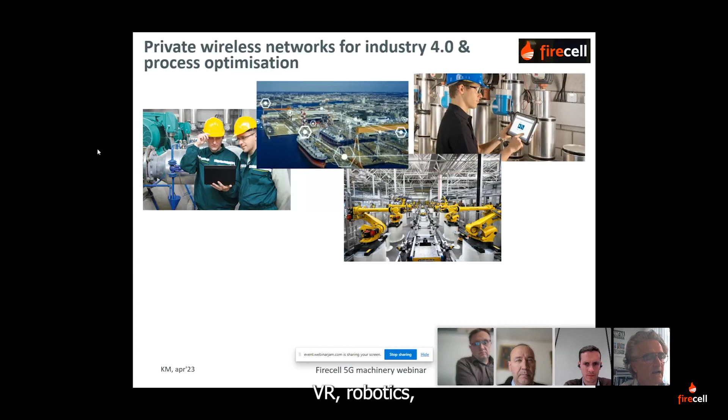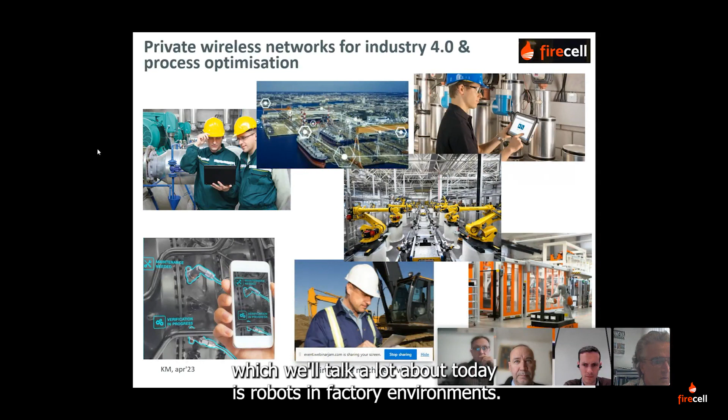Private wireless is more or less what is often called Industry 4.0, industry automation in its latest stages. You're talking about ports automation, manufacturing, heavy industry, lighter industry, use of tablets, AI, VR, robotics, augmented reality for maintenance purposes, steering of heavy industry like excavation and mining, and of course, which we'll talk a lot about today, robots in factory environments. These are all images of typical Industry 4.0 factory automation kind of settings.

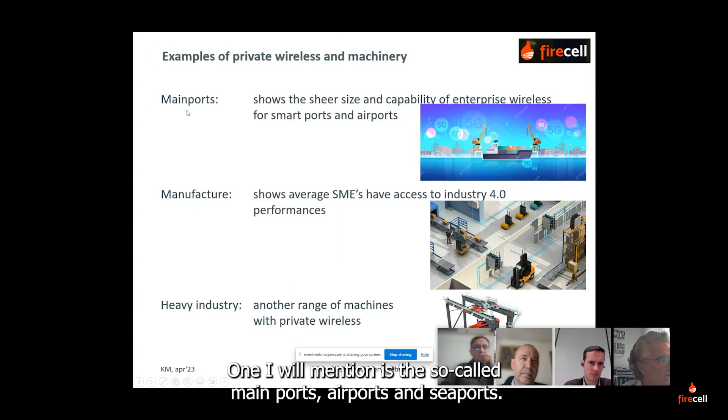I will use a few examples. One I will mention is the so-called main ports, airports and seaports. Of course those are large, and not everybody in the audience has a port, but I use those to show you the sheer size and capability of enterprise wireless, what wireless can do for an enterprise. These are truly large examples. Then I'll show you an example of manufacture, which is what today is all about, and another small example of heavy industry, a bit like what Amada will be showing.

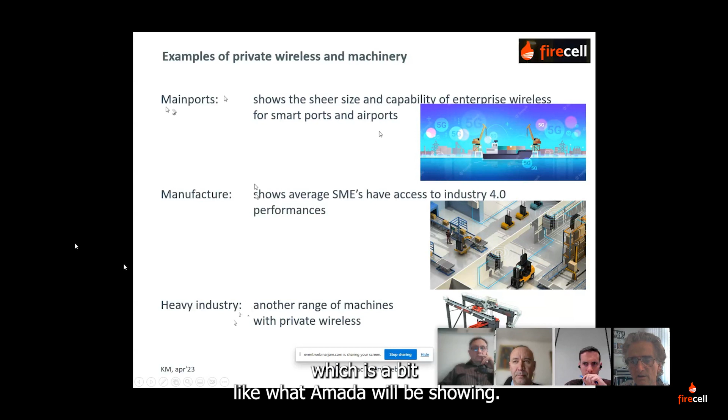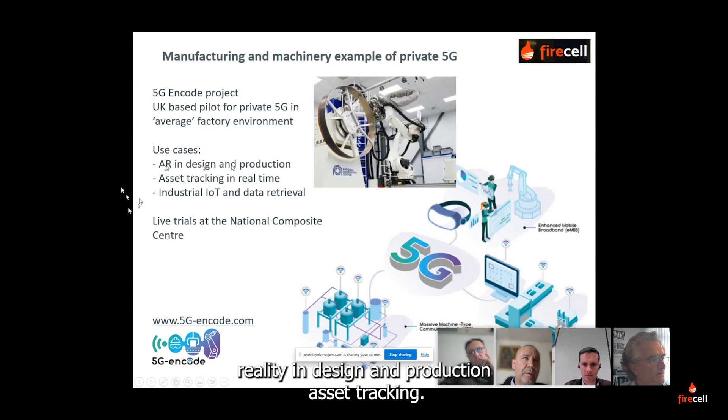Here's a more average example, if you like. This is a composite factory in England, in Bristol, where they use 5G for, as it says here, augmented reality in design and production, asset tracking, so where are my devices in real time, and industrial IoT, and data retrieval to control and steer.

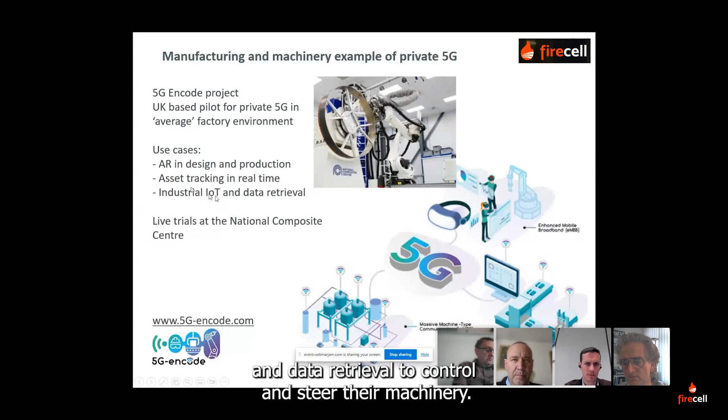And here's an example of a truly heavy industry, Kone cranes. They're developing huge cranes, and they're using private wireless for automated crane control. They're experimenting in their laboratory with completely unmanned cranes.

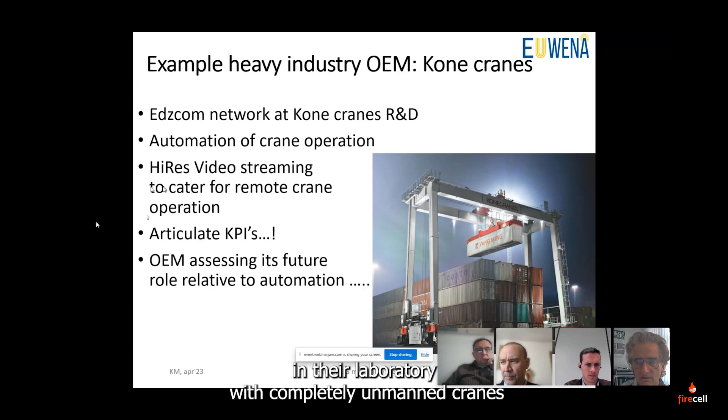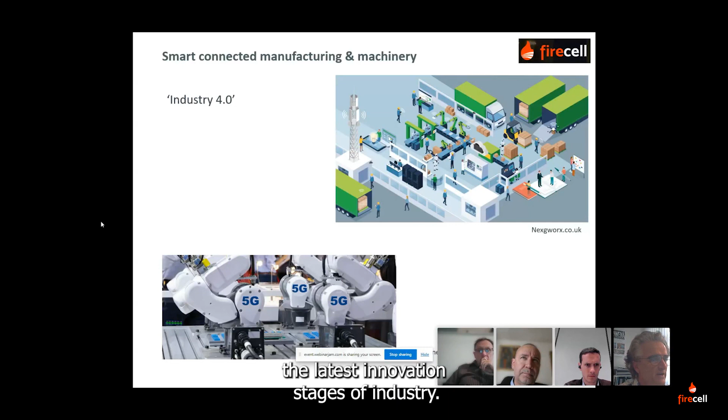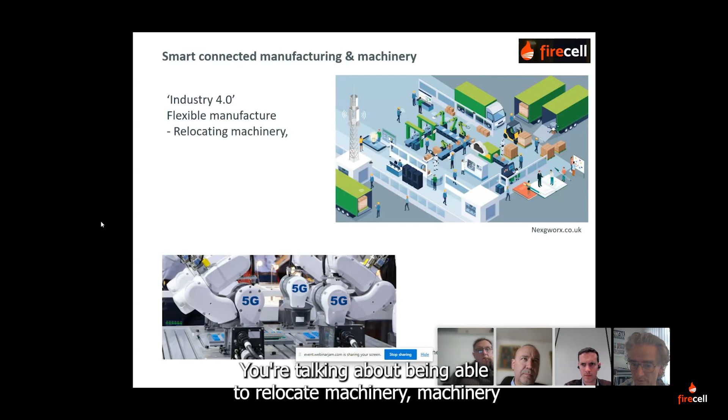In manufacture, you're primarily talking about Industry 4.0, the latest innovation stages of industry. You're talking about flexible manufacture, which is very much what Omron will also address in his presentation. You're talking about being able to relocate machinery without having to pull wires, because once your machinery is on 5G or wireless, you can move it around and it's still connected. You don't need to rewire anything.

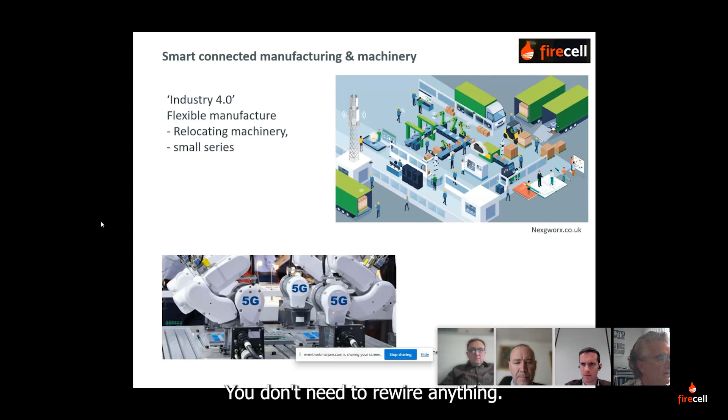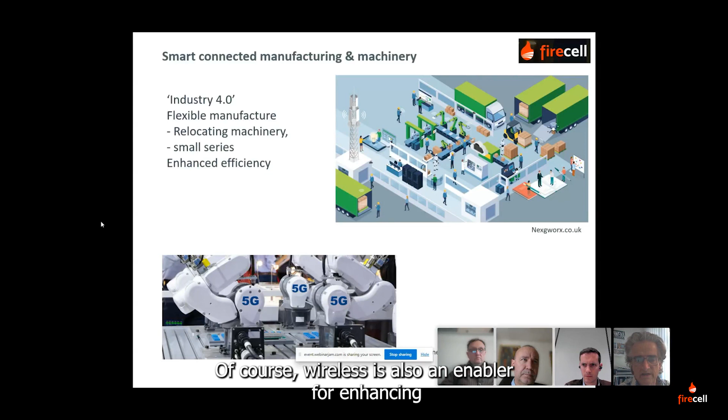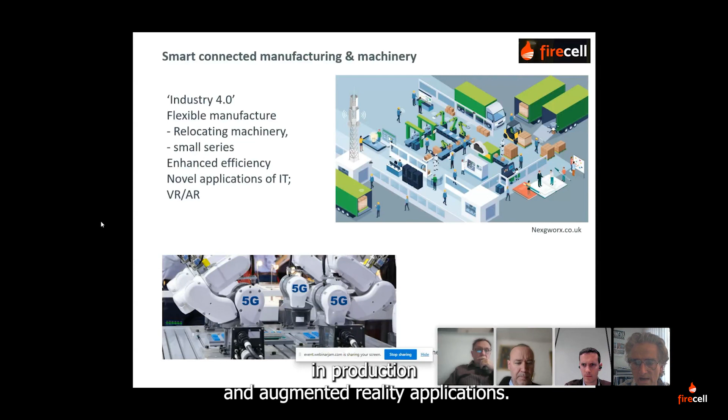The ability to produce in small series, and again, Gilles from Omron will also highlight this. Enhancing efficiency, of course, wireless is also an enabler for reducing the cost and enhancing the efficiency. New applications like VR and AR in production and augmented reality applications. Wireless is, of course, an enabler.

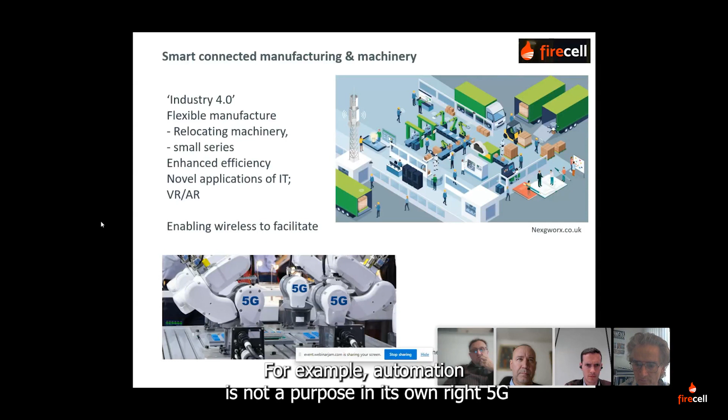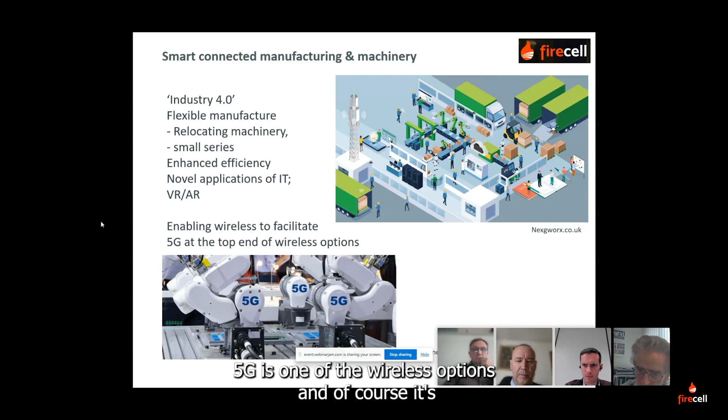Let's not over-exaggerate the importance of wireless. It's an enabler for plant automation, not a purpose in its own right. 5G, and we'll address that in the presentations of all three presenters, is one of the wireless options, and of course it's the top end of the wireless options, but it's not the only option. There's 4G, there's Wi-Fi, there's IoT, there are other standards.